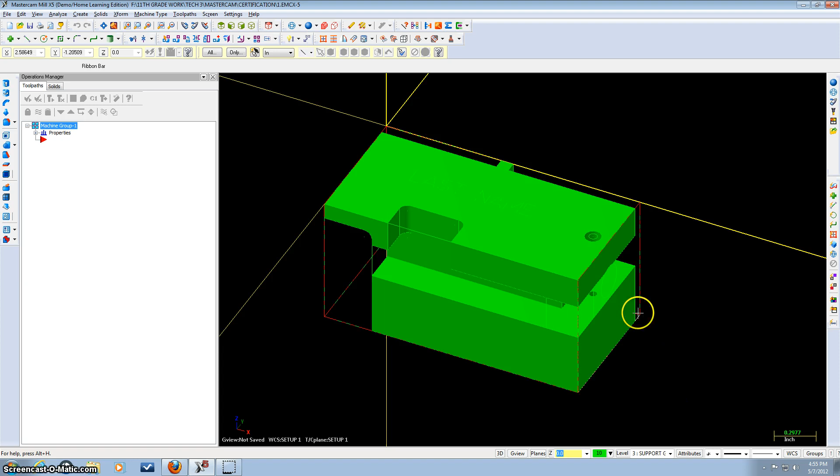Okay guys, so in this video I'm going to take you through step by step how to do the toolpath for setup 1. What you want to make sure first is you go to WCS View Manager and make sure that setup 1 is your active setup. Otherwise you're going to set it up in a completely different area.

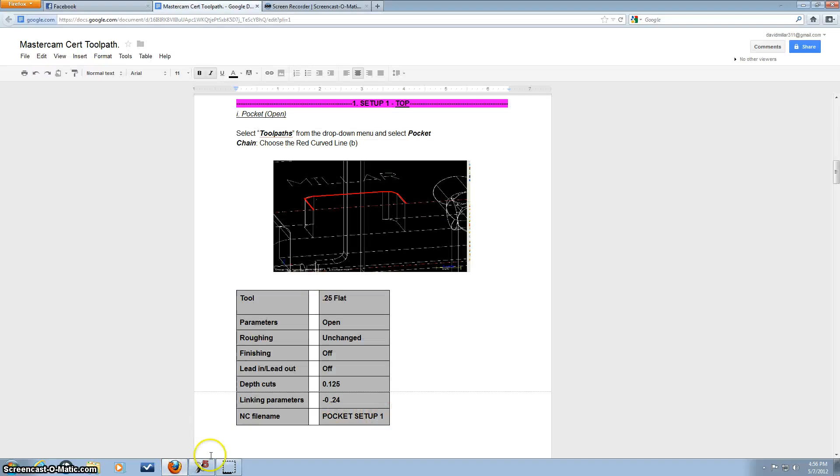So the first thing we're going to do is change the wireframe, and the first part we're going to work with is the little pocket right in here. So you're going to go to Toolpath and you're going to do Pocket. It's going to open up a new toolpath, and we're going to name this one Pocket Setup 1. So go ahead and change that now.

And then hit OK. For the chain, you're going to start at this corner, or this side, and you're going to follow the chain all the way. Oh, not that one. Let's restart. Nope, wrong way. There you go. All the way around. Hit check.

One thing I want to point out, guys, before I move on, is that you want to make sure you've done curve on all edges first. Otherwise, if you select this, it's going to become a continuous chain and you're not going to cut it out right. So make sure before you do anything that you have curve on all edges, which you should have done if you watched my last few videos.

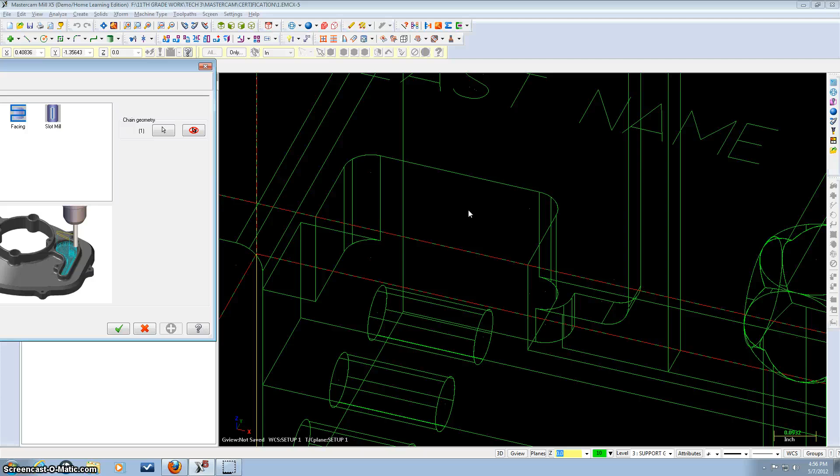Anyway, so for this toolpath, make sure it's in Pocket, which it is. For the tool, go to the Google Docs. We're going to be using a quarter flat. So find the quarter flat on the list right here. Go to Cut Parameters, change pocket type to Open, and leave everything else alone. Under Roughing, leave it alone.

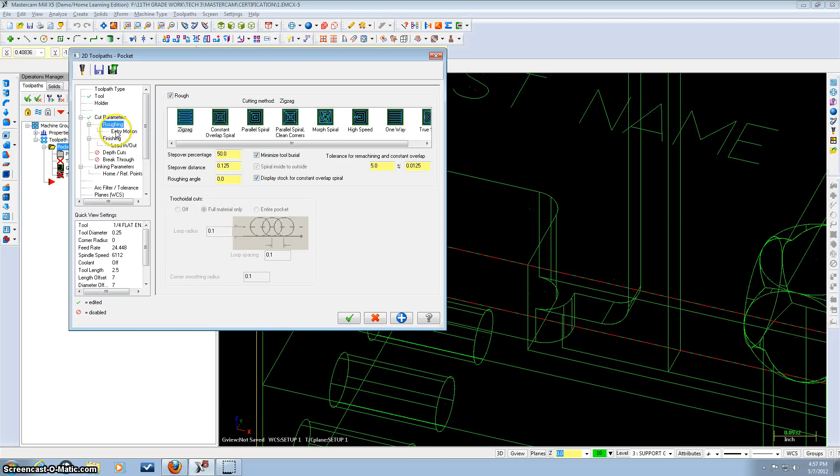Entry Motion you can turn off. Finishing, you can turn it off, you can turn it on. Just remember, if you do turn it off, it does save time, but if you keep it on, it's a nicer cut. Lead in, lead out off, and depth cuts on. For the linking parameters, all you're going to change here is the depth to -0.24.

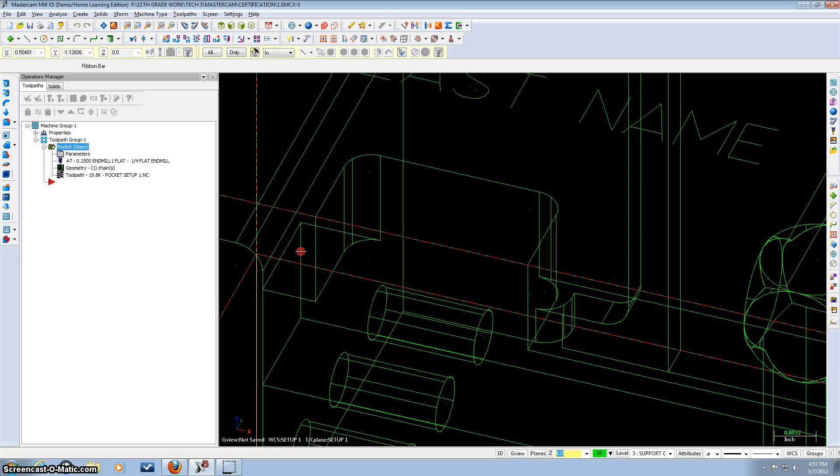Now you can enter this in, or you can select the box depth, and then just choose a point near the bottom of the pocket. Then hit check, and you'll see the little blue bacon pieces coming out like that right here. If you want to check it, you hit the little purple box at the top saying verify, zoom out, and then just hit play. See, that's a nice cut right there. Did what it was supposed to do.

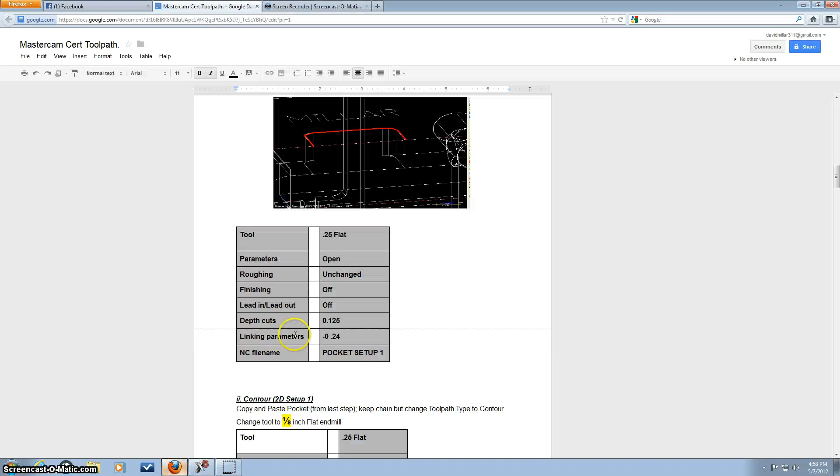Now because you did the quarter flat, it couldn't do the nice fillet we had in here, the 1/8 fillet. So what we're going to do now, let's go to the Google Docs. We're going to make a contour. So under this, do a toolpath. Actually, you could do that, or you could make it easy and just copy and paste that. For parameters, go to toolpath type, change it to contour. For tool, you're going to change it to 1/8 flat.

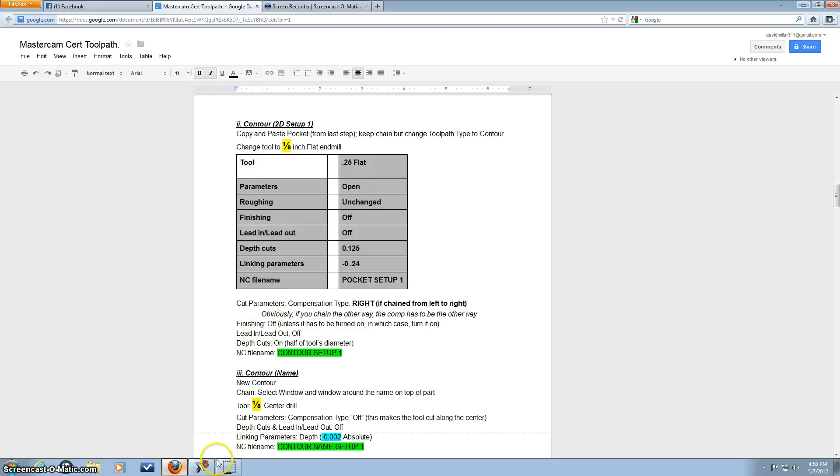Cut parameters, make sure the compensation type is on the right. Depth cuts on, lead in, lead out off. Linking parameters, same as before. Depth is -0.24, everything else stays the same. Hit check. Regen. If you want to check it, select all and run it. That's nice. Nice pocket right in there.

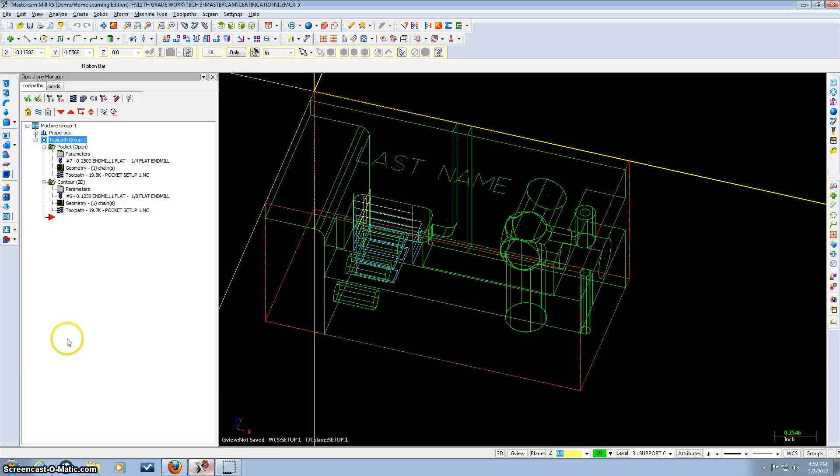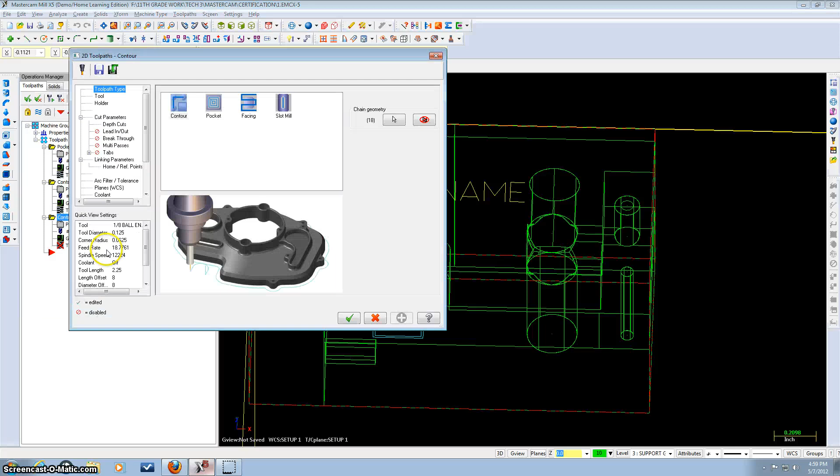So the next thing we're going to do is work on the name. What you do now is under this, select the little red arrow, the blank space, toolpath, and contour. Instead of a chain, we're going to use window, and we're going to window around the name that's on the top. It's going to ask for a starting position. Just select any corner of your name, and then it'll select everything. So hit OK. The tool here is going to be the 1/8 center drill.

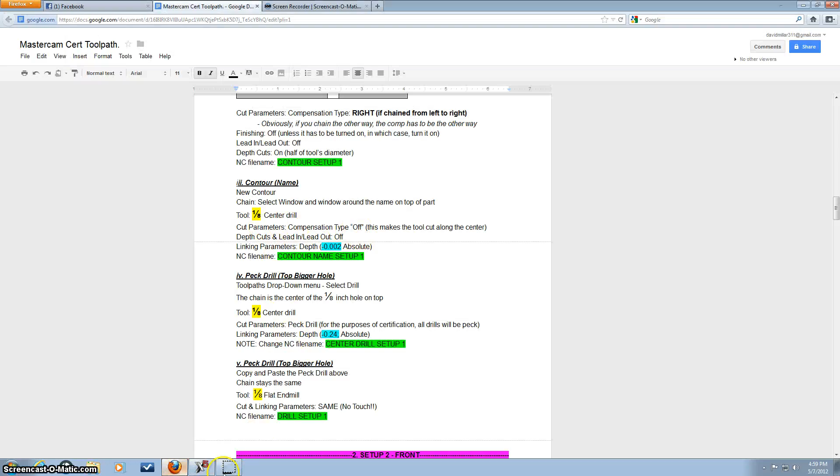So find that on here. It's tool number 2. Cut parameters. Compensation type off, because you'll notice when I turn it off, it makes it dead center. It doesn't cut to the right or the left. It cuts dead on. Depth cuts you don't need on because you're not going half the distance of the drill bit into the part. Lead in, lead out, keep it off.

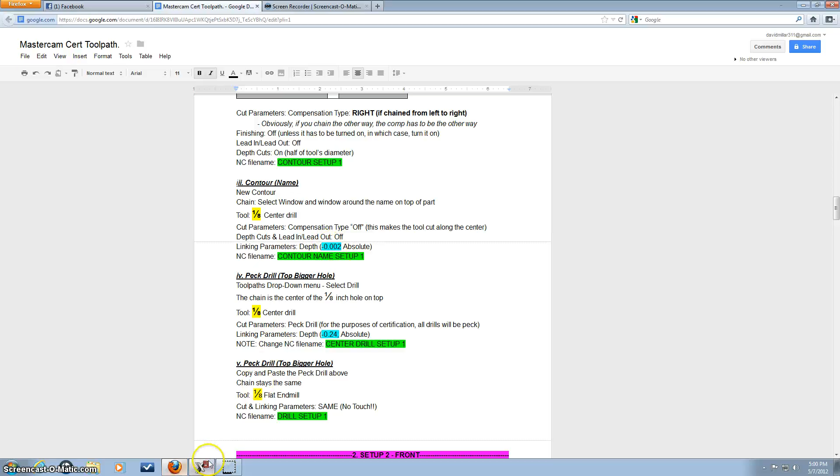And linking parameters, the depth here is going to be -0.002. Check that on Google Docs. -0.002. Absolute. Hit check. Run it.

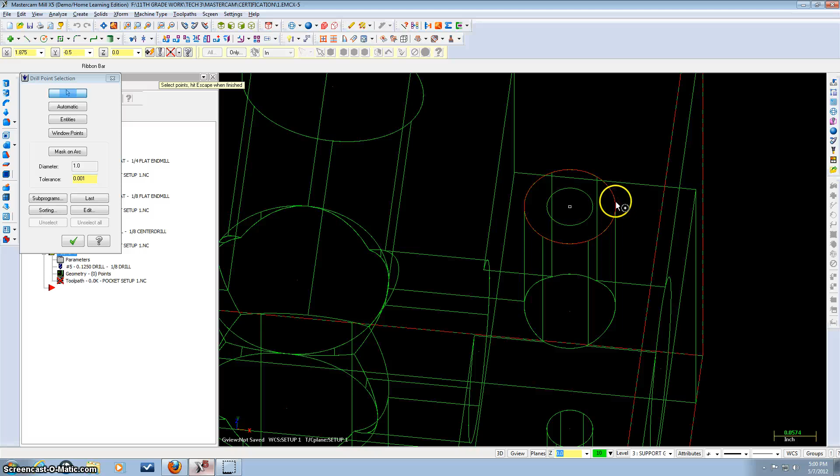Nice. One of the last things we're going to do is a 2-part step for this hole right here. So what you want to do first is toolpath, and you're going to do a drill this time. It's going to ask you to select the point. You can select the outside of the circle or the center of the circle here. I'm just going to select this one for peace of mind, knowing that I'm selecting the right thing. So you hit check. The tool for this one is going to be the 1/8 center drill,

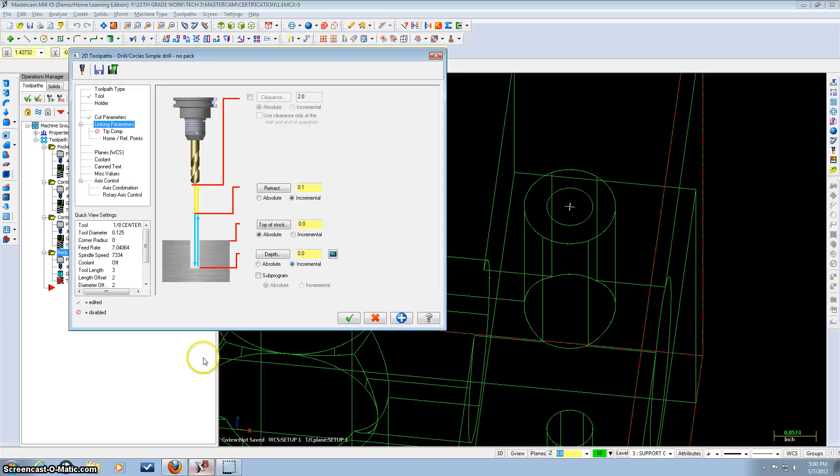which we just used. Cut parameters, we're going to do a peck drill. And then linking parameters, the depth is going to be -0.24 absolute. But you could really just select a point down in here and then just select absolute. And hit check. Should run it correctly. And it should look something like that when you first use the center drill.

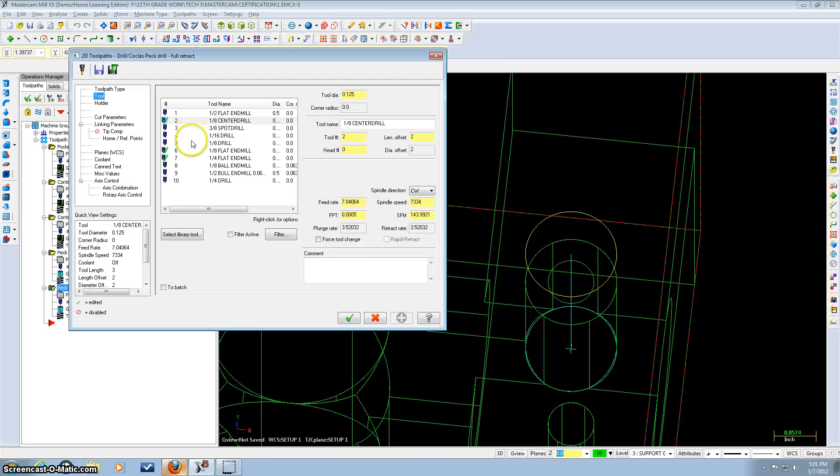For this next one, you can really just copy and paste this one. For parameters, everything stays the same except the tool. The tool in this case is going to change to a 1/8 flat end mill. So find the 1/8 flat on your list and then hit check. Regen. Select the first peck drill along with the last peck drill and then run it. And your hole should come out nice and clean.

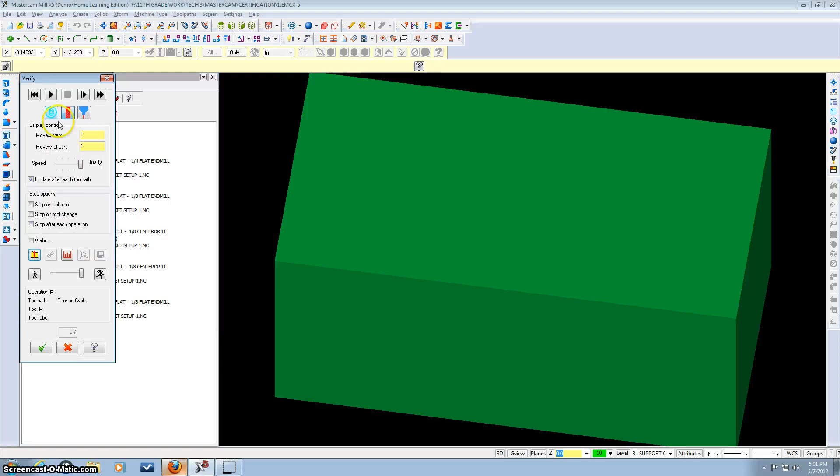If you want to run everything now, hit verify, fit, and then turn the quality up for the best results. And if you want to, you don't have to do this till the end though. For tool tolerance, in the verify options window, add another 0 to make it 0.0008. That makes it very specific. So you hit play, everything comes out nice and detailed, and you have setup 1 nice and done.

So that's it, and in the next video, I'm gonna go over Toolpath for setup 2.